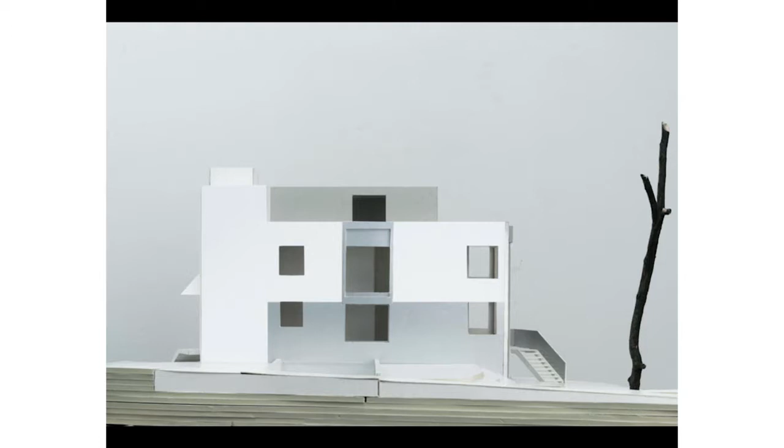When we design facades, we always look at the volume in a planar way. We don't try to look at it over the corner. With this building, we made every facade almost different. This is more like a shield that contains the loggias. The back facade is more free flow. And the facade to the street is very figural and plastic. Of course, it's the main paradox of architecture that you're doing volumes that are at the same time composed of planes. So is it planes or is it volumes? Or is it volumes or is it planes?

The plan is very simple. It's divided into 2 parts. There's a big living room and the bedrooms are in the back. There's a central pillar that unites an extra room that you can connect with the living room or have open. The windows themselves define areas that structure the space.

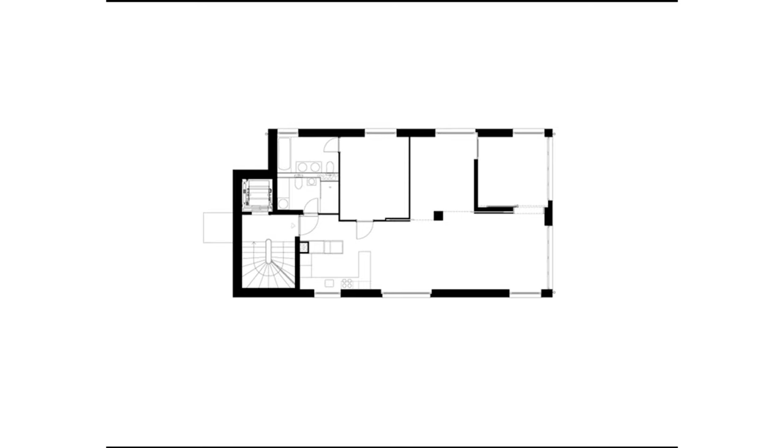We were super happy with the project. The client was super happy. We submitted the building permit. They came back very quickly. Two weeks later, we received a letter. The client received a letter from the municipality saying, when we digitized the zoning plan, we made a mistake. You don't have a B2 zone, but you have a B3 zone. So the client called us and asked, is that good news or bad news? We said, it's good news, of course. It's 70% more area on the site. That was a huge problem for us because we...

I think it's me. I think... You want to switch? Yeah.

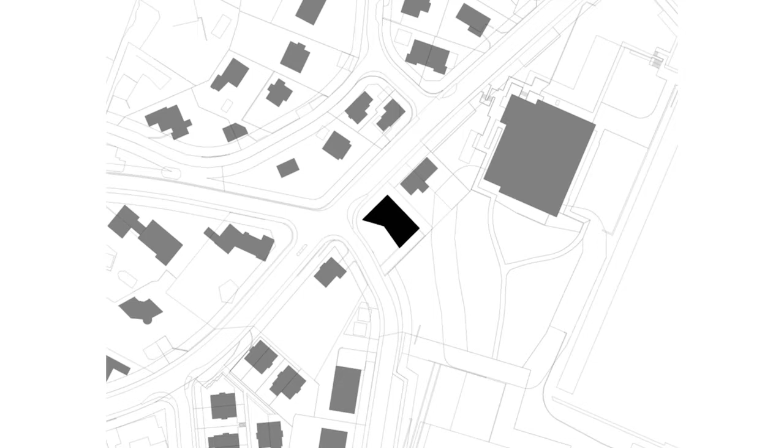It was a huge problem for us because we were so happy with the first project. It had a nice vertical volume, it was very figural, had presence. We ended up with something that was more like this - very horizontal, a bit too big for the neighborhood. It had all of a sudden 5 apartments instead of 3, and it raised a lot of questions about collectiveness and expression in a building like that. It's not a real apartment building, but then it is an apartment building. The plan went from this to this.

So what happened is that you recognize again this kind of chaotic sense of cellular rooms and angular walls and all that stuff, but there are also these pillars. These pillars have now a slightly different function. They're also about centering space, but they're also about connecting space.

In this case, you see that they are creating a center of a common space, a common living space. At the same time, they're separating the living area from a kind of winter garden and a loggia, which is an outside space. So while all the spaces are, architecturally speaking, interior spaces, some of them are in reality half outside and half inside spaces. So this pillar does an interesting thing - it connects all the spaces while also separating them. And to make the point, one of these pillars is load-bearing, is structural, and the other one is hollow, so it's architecture.

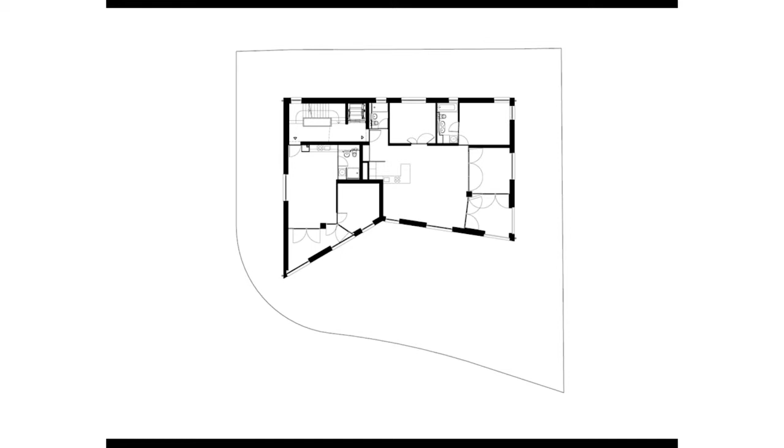The facade, the main facade that was the garden facade in the project before, became the main facade on the street side. Recycling.

It lost a bit of frame, but it still has this central motif. We also made it slightly higher, put that line down in order to lift the gravity of the facade in a zone, like this. So it's a real piano nobile. And from that piano nobile, there's windows hanging from that line, because the fundamental problem of a small multifamily dwelling is that you don't have enough stories, enough repetition to create an idea of collectiveness.

You have just 2 stories. It's really stupid - is this a single family house or is it something collective? It's the same apartments, just rental stuff, rental apartments. So what we decided to do is only in the facade create a difference, creating a motif where the top floor becomes the piano nobile and the other windows are kind of attached to it. So there's a hierarchy in the facade that does not exist inside the building, besides the ground floor having a different relationship to the ground than the top floor.

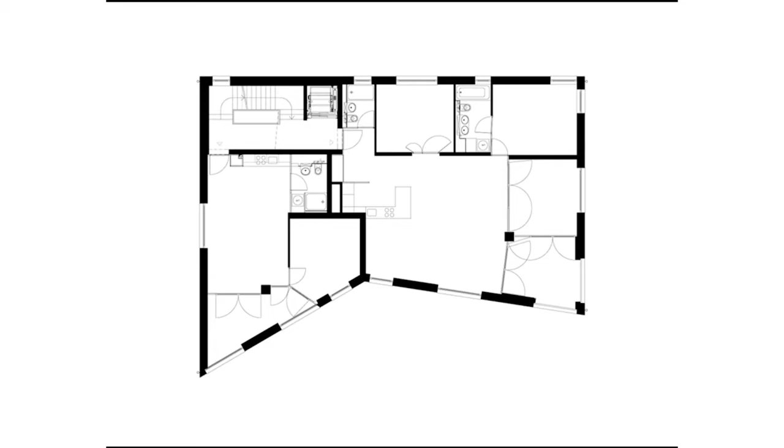We were looking at the Laurentian staircase by Michelangelo, and what we discovered there is something really curious. While you think it's classical architecture, when you look twice, you suddenly realize there are these elements—columns, pillars, pieces of walls with frames and framings—but they're not connected. They don't have a hierarchy. They all are separated and sit next to each other, with some space between them.

So what we discovered is if you put things together, just by putting them next to each other, there's a relationship, and that's really fantastic. So the singular element retains its power, its independence, and its dignity while it comes together with other elements without actually physically touching. Michelangelo is a master in separating elements and working with in-between spaces, proximity, distance. The corner of the Laurentian Library where the columns disappear into darkness with a pilaster—James Ackerman wrote about it. The columns are not meeting, they are mating.

And what happens if you look at the section, this kind of constructive structure of that project, you discover what kind of hierarchy this project is about. It's crazy—you see the architectural niche with a piece of pillar starting to the left, with two columns enshrined in that niche. Behind there's a thin wall to the main library space that's maybe only 15 or 20 centimeters thick. It's ridiculous.

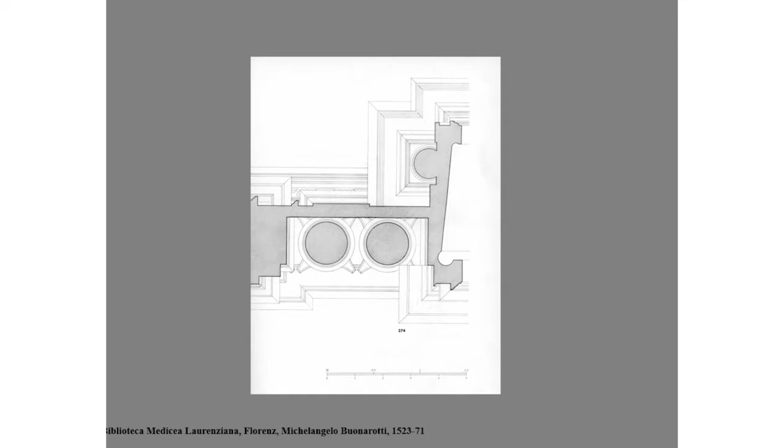There's maybe a contemporary dilemma with classical architecture and with putting a column next to a pilaster, which is a dilemma that we also haven't solved yet, and I don't think we want to really try. But in contemporary art, sometimes you find ideas that help you solve these dilemmas.

So this pair we really adore. It's by Richard Artschwager. It's a door and a super elegant typographical sign that could almost be the moustache of a French gentleman. This elegance is counteracted with a door that is out of proportion, that has a painted surface that is also in a kind of awkward way. And those two things really work just as a pair, with an incredible energy.

So what we were looking at on the inside was the question of how the outer windows relate to the interior windows. We discovered that if we identify them with one another, if they are actually the same, it would be better. So we took the scale of the windows from the outside to the inside of the building, and these pairs of openings actually have the same dimensions as the windows. We're not talking about a difference between a gentle interior texture opposed to a kind of shell - it's both, and it's the same. We take it from outside into the building.

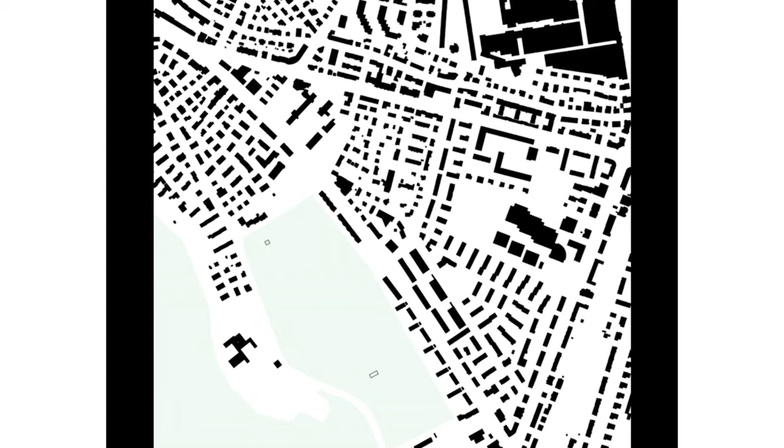That's the main characteristic of that area from the post-war expansion of the city. So while we had to replace a building and do a much bigger building, we wanted to respect that spatial texture. The figure we came up with seems expressive in its form, but it's not meant to be expressive. We conceive it as a series of planes, like a paravent, that's being folded, demarcating a site, and at the same time shaping the surrounding area.

On the north, the upper side, it follows the little road. On the southern side and the others, it's kind of hugging spaces that are defined by beautiful existing trees. So it's creating a series of exterior chambers.

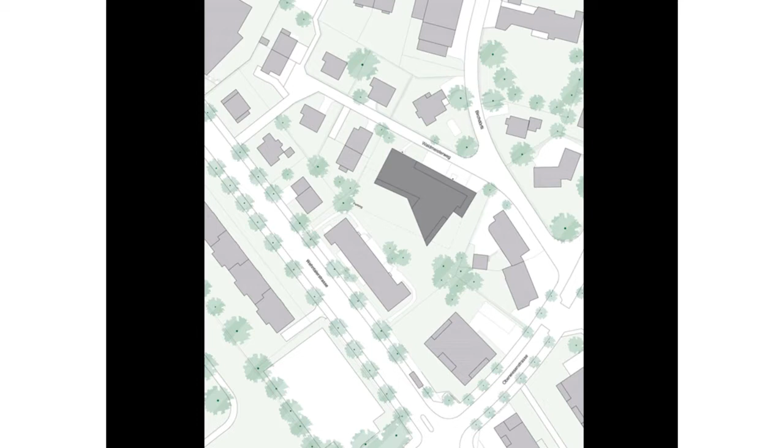What? Exterior chambers. Oh, exterior chambers. That's good. You never said that. So this is partially stand-up comedy here. Yeah, it's a bit early for that, huh?

The plan we insisted on being rectilinear - there's only very few exceptions where we had to mediate between the angled walls of the exterior with the structure of the apartments from the inside. We kind of saw it as if you would cut out a city plan with a nice shape.

So later we discovered - much later, of course, we're honest about that - this work by Sol LeWitt, where he stayed in the city of Amsterdam and took a walk from one place to another, and at the end of the day he would connect the dots of his walk and cut out the piece. So it's really kind of the negative of what we're doing.

There are clearly competing needs in architecture - the need for an interior structure and the need for the exterior form - and we feel increasingly that they cannot always be easily reconciled or harmonized into one. But in our design, we want to retain the tension between these needs and necessities. So there's a kind of half autonomy of the parts - the facade is partially autonomous versus the plan, and vice versa.

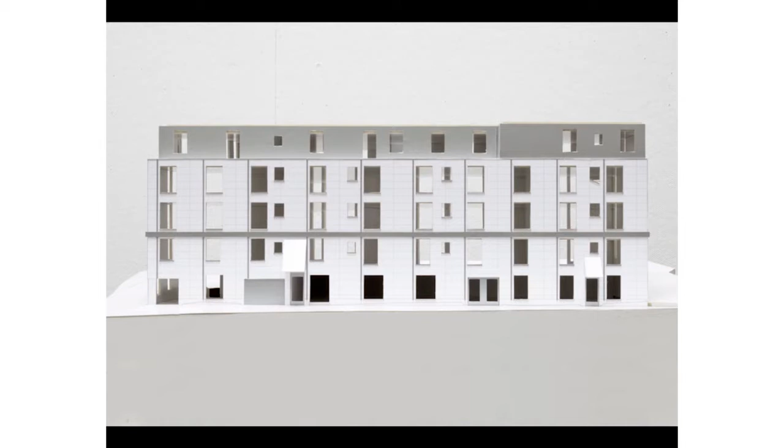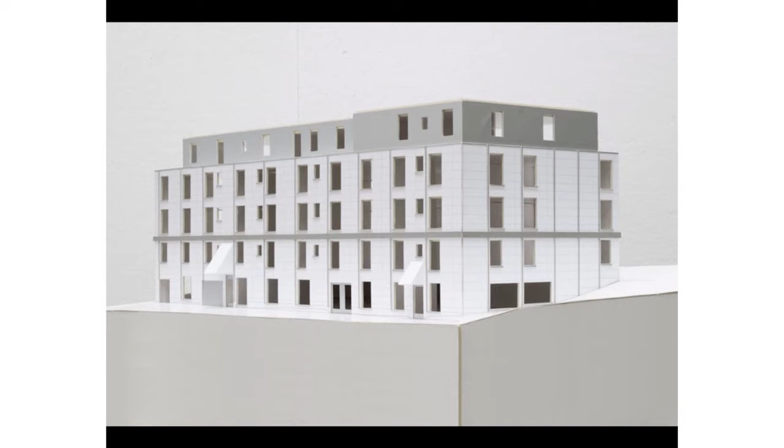The practical reason for this was that the topography of the site would rise almost by one story toward the back of the building, which you can see on the right side. So what would have happened if we had built the building from the bottom up? The ground floor would start to sink into the ground. So by lifting that center of gravity, creating a central line, you somehow solve that problem, because it doesn't matter if the line on the ground is a bit wobbly and rises.

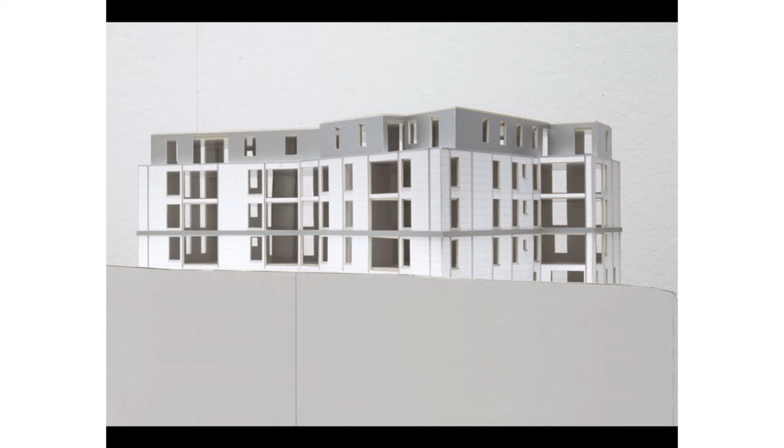And it also goes back to one story here on the garden facade. You can see how you can integrate loggias within that system without destroying the surface quality of the building, even though they are really big holes.

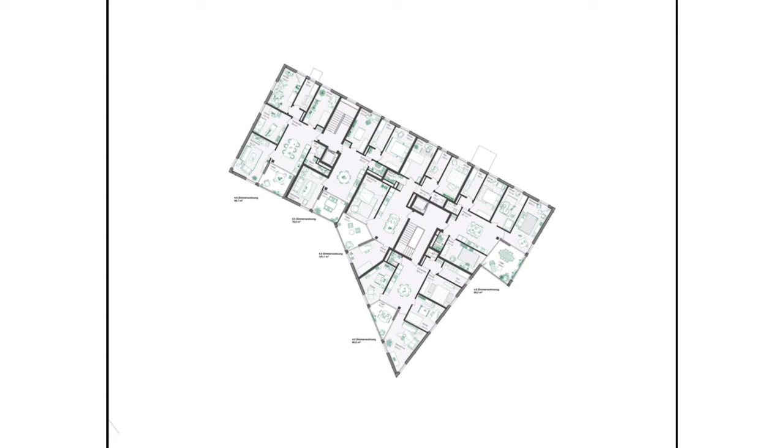The client asked for a specific solution for the living, dining area. A lot of apartments being built in Switzerland at the moment feature a connected space where living, dining and cooking are in one room. Low-cost housing in Switzerland doesn't mean you can build cheaply, because wages are very high there. But what you can do is design apartments where more people live on the same surface, and find smarter solutions for plans.

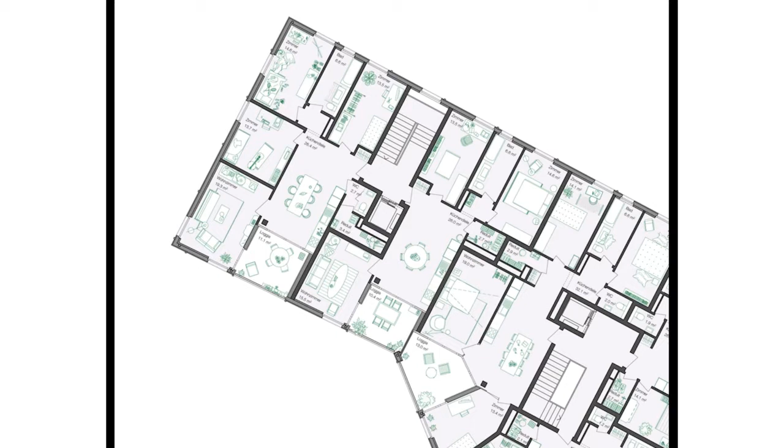So the basic idea of the plan is that you enter into the kitchen. It's quite a rural thing to enter into the kitchen. It's a big kitchen distribution space, and attached to it there's a living room that you can close off and also use as a bedroom. And in this triumvirate of kitchen, living room and loggia, there's a load-bearing concrete column in the corner. Then the bedrooms and bathrooms are on the backside. Even though the shape of the building generates variety, the principal idea of the apartments is the same throughout.

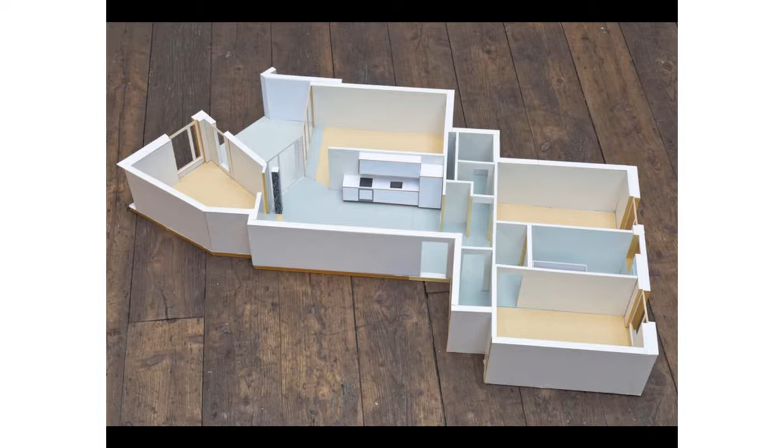This is the moment with this kitchen room, the column. There are different floors - a kind of overlapping tiled floor next to the living room, so that you can bring in plants and put them here, and the parquet. And there is a shadow - the column casts a two-dimensional shadow. So there's always sun shining in this apartment, even when it's very grey in Zurich.

We took that idea from Johan - Johan Celsing. Is he in the audience? He's skipping the lecture, but it's in the house of his father, in the entrance area. There is a shadow made out of stone. This is a bit more brutal and poppy, I would say, and less refined and elegant. But it also serves, of course, as a threshold that connects the two rooms.

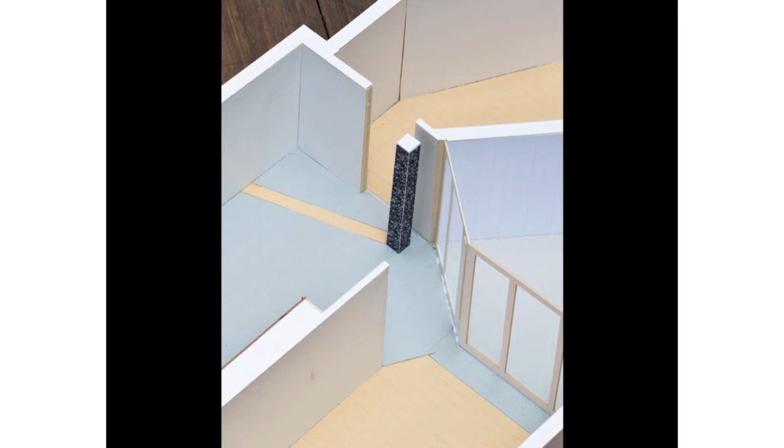Oh, that just hurts my heart. Yeah, huh? I know, we lost this competition last week. It's in Munich. We came in third, you know, and it's really an amazing story.

For the Germans, and I guess like for all the other Europeans - Switzerland has an amazing competition system. As a young architect you can do public competitions, you're able to win them, and when you win them it's very likely you'll build them under fair conditions. In Munich it's quite different - there's a city architect who selects the same kind of 12 offices for invited competitions, so it's really hard for young practices to engage and build up a practice.

We have friends of ours who decided to change that. They said, fuck the system, we become the client ourselves. They founded a cooperative called Kooperative Großstadt, and with subsidized money from the city of Munich, they bought a site in an area where nobody wants to live - Riem, München-Riem, where the old Messe Gelände was. You can see it on the site plan - all very polite buildings, but with a lot of distance. It's quite green, a complete lack of urbanism and intensity, even though it's not a modern city plan. It's a kind of contemporary city plan that's about framing the streets while still being open. We really wanted to win this competition, but it was an open one, so it wasn't so easy.

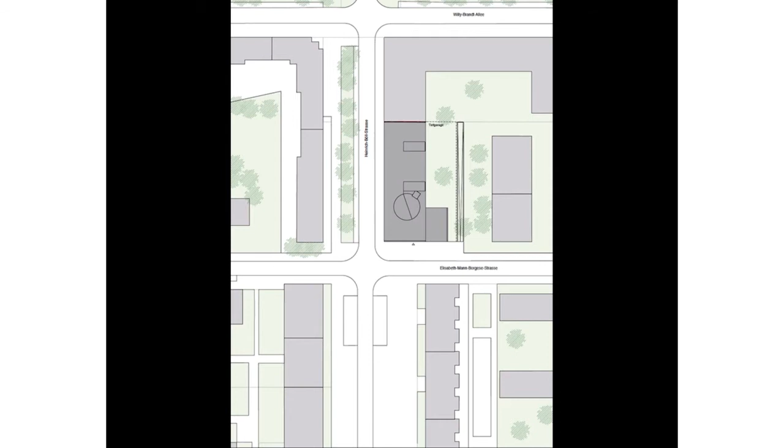On the ground floor they have a program, it's kind of, how do you say that in English? A workshop. It's a workshop for the people to live there, but also for the whole area. There is a cafe, library. It's kind of quite a loose situation. A public program.

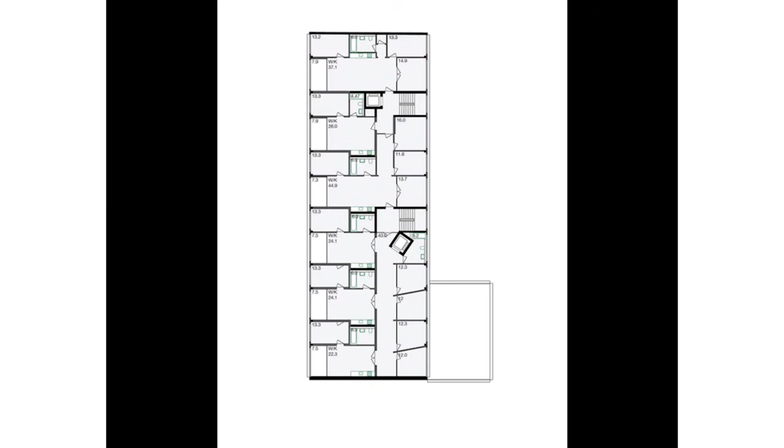We decided to have the normal living on a core in the back side and the special living in the front side. You can see there's a certain generic quality about halls spanning through the building, and there's another big hall inscribed in this stripy texture. It's another special program here. And then there's a beautiful little roof kitchen with a garden on the outside and lots of solar panels.

For you, Tom, huh? Scully, huh? Not you. He's Irish.

We were looking at this painting by Sean Scully, and it clearly shows a cohabitation of two different sets of stripes that would be independent yet connected, that have different scales, that have a different texture, and we were looking at that both in plan and in elevation as a main base idea.

The interesting thing about these paintings is that the stripe is very generic. But by juxtaposing two generic ones, there's something that you could read as a figure, or at least there's a communication and a tension, and there's a fracture, and there's a lot going on.

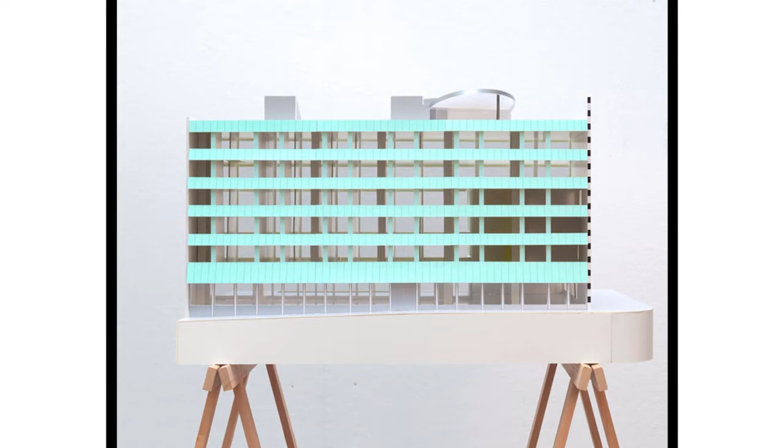So our long street facade had to accommodate loggias and glazing, so we quite coolly just made our green stripes. And then when you come around the corner, there is this kind of Josephine Baker wall that connects and overlaps with this, with a huge two-story loggia.

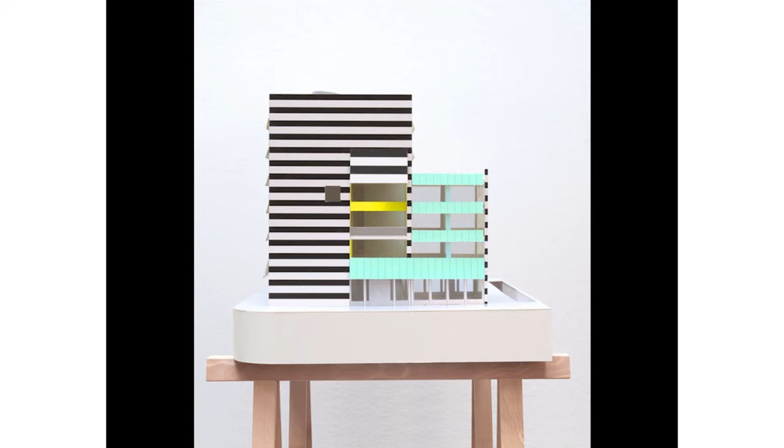We were thinking about what does this utopian collective living mean? We think it's not just about accommodating certain needs and doing the mechanics of the utopian age, but it's about advertising that, giving it a voice, giving it a language that is projecting outward. Because a local utopia within the city becomes very problematic if it becomes a shielded private dream of a group of citizens that would want to exclude themselves from society. But we think it should be the opposite. So we are trying to be as aggressive as possible and as joyful as possible.

You can see that here these plates are sticking out, so it's a very fragile plasticity. It's more like leaves almost, and less like a closed surface. And like in the Scully, it's about the scale of housing being really defined. It's defined by the repetitive stories, it's defined by the scale of spaces of their windows. So in housing, you can immediately read it.

So for the collective, it sometimes becomes problematic if housing is not more than the addition of its single parts. So what we are trying to do is create incredible jumps in scale, while the totality of the striped facade versus the singularity of the loggia, the big cut with the yellow cut, versus the kind of structural repetition of these green stripes, this dramatic jump in scales and the juxtaposition of those scales, we thought was a good way to talk about the collective.

And you see, even though this might look quite postmodern, there's no irony in this project. It's dead serious with a lot of humor.

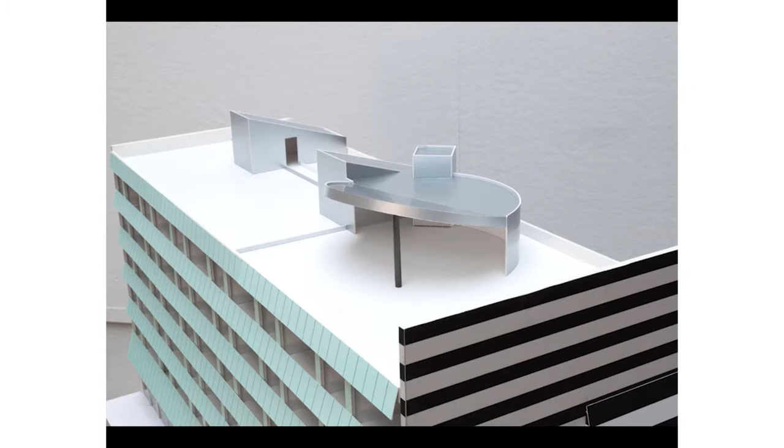And then there's the roof garden that's a bit more free.

As we said before, the idea is that you work with this very simple, very rigid structure, and then you insert a figure into this. This was really inspired by another example from Italy: the typology of the Venetian palace, in which from the main canal there's a big hall inserted into the volume of the building, which goes deep into the building. It's called the Portego, and it's connecting interior courtyard spaces. It's at the same time the main collective space within the building and the distribution space.

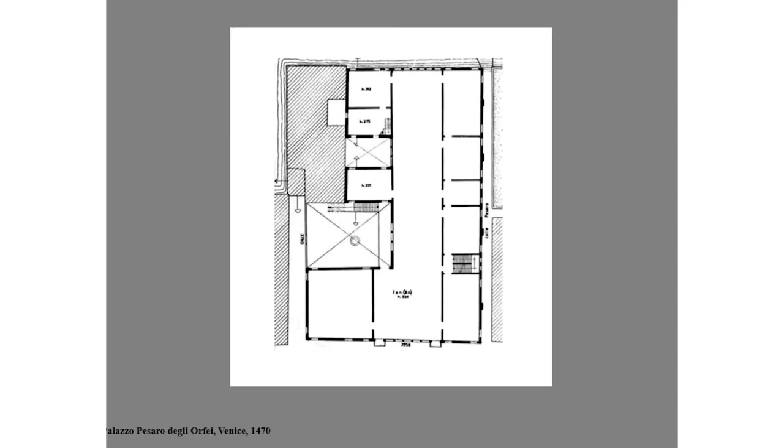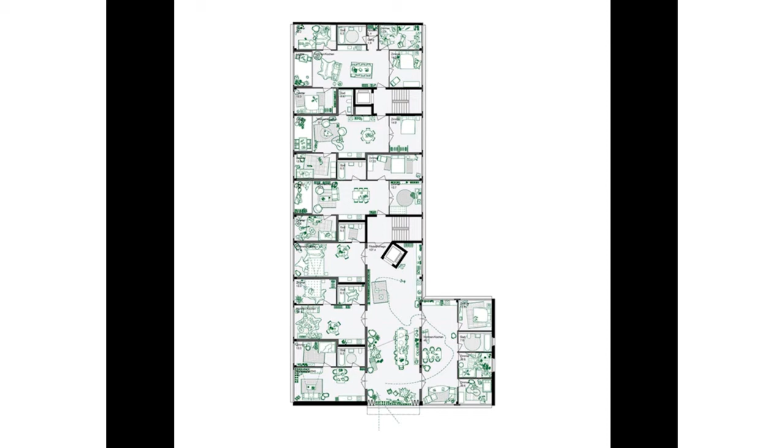They wanted something that's called branch living. So those apartments here and here are a bit smaller than the conventional ones in the back, and the area that they lack, they gave into this big branch. So this is a 2-story room, there's a balcony here, there's a big collective kitchen, it works like a winter garden that you can open, and it's so big that it can be programmed in several ways. This is the room.

The last project. Hang on, there's a quiz question. Are you ready for a quiz question? So what do you think this building is facing?

Holland. Yeah, it's actually something like Holland. I think there's another truth to this. Actually, Tom, you're pretty close, because it's a rational, industrialized way to talk about agriculture.

So you're very close—it's the slaughterhouse that it's facing. This house is in the last building block of Zurich. You can see here the structure from the turn of the century, the block structure. There's a really long block here that at some point just stopped. There is the slaughterhouse here with thousands of animals dying every day and with quite a nasty smell from time to time. And there's the football stadium right here.

So we're looking at the heroic situation of the modern building, the edge of the city, where the city ends and the sprawl of the countryside begins with IKEA and all these big boxes. It's the end of the city. And it's the Limmat valley, so it's actually like Holland—it's very flat, but it's surrounded by hills on both sides, not mountains. And so there's beautiful, huge allotment gardens in the back.

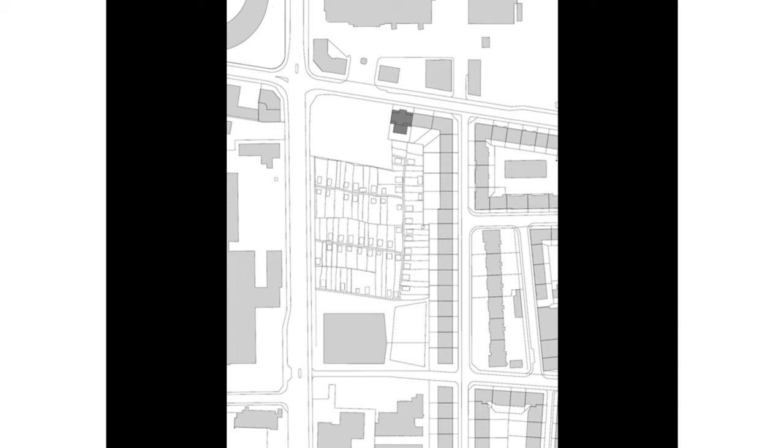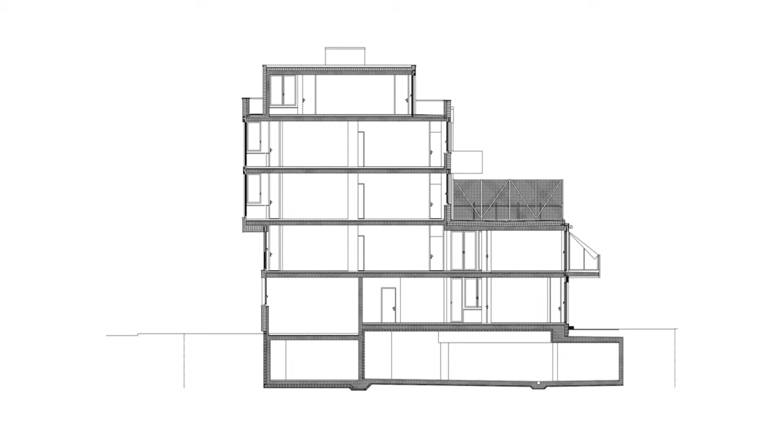Towards the street side, we really try to be contextual. We try to make a plaster building. We tried to work with vertical openings to kind of fit next to the neighbors, but it was always a huge problem. The buildings next to it would just take command of our house and would kind of take it down and make it always feel very weak and not appropriate.

But when we decided, then we said, okay, let's just make a modern building—let's make some band windows, big, direct and brutal and modern. From that moment on, the building had its autonomy, and it actually entered a dialogue with the neighbors, a fruitful dialogue. All of a sudden there was a distance between them, but it was a bit like at a party when you meet people that are different than you, but you can still be polite with each other and have a good conversation.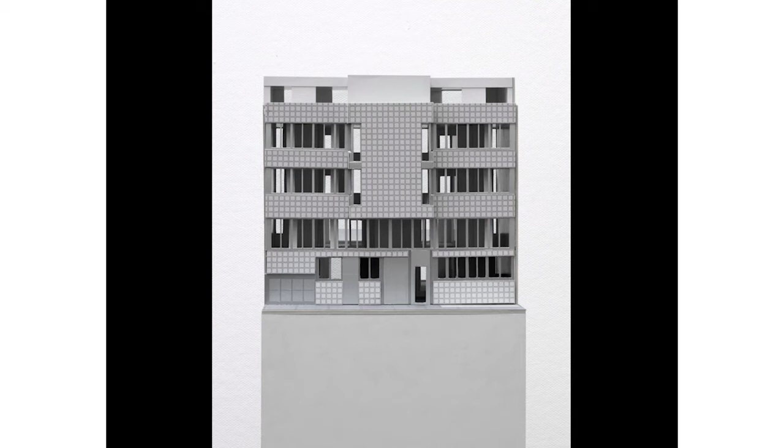Our two big brothers we were looking at, or the two absent friends, as we say sometimes, were Le Corbusier's building at the Porte Molitor in Paris, where he, as you know, lived on the top floor, and the Palazzo Rucellai by Alberti in Florence. It's a strange pair, isn't it?

But the reason why we looked at them is that it's very obvious in the case of the Porte Molitor immeuble, because it has a texturedness of frames and fillings, and there's an incredible development from the bottom to the top, a transformation of figure where you are not able to read where the base of the building begins and where the proper building is starting. So the base could be one story, it could be three stories. There's an overlapping of figures over the height of the building.

While we were looking at the Palazzo Rucellai for a different reason—you all know that it's mainly only a facade. Rucellai bought up a few houses, and he had Alberti do a new facade. He tried to buy more houses to make it bigger, and that never happened. So it's a facade project.

But what he did is he used the classical orders—horizontals, verticals, and pillars—but at the same time he was talking about the wall. He did a rustication of the wall. So is it wall architecture, or is it the architecture of order? In fact, he collapsed both of them in the same plane. You can see that the rustication casts basically the same shadows as the classical order. So it was clear that it was not about a hierarchy of these two elements, but about doing two things at the same time. It was about the architecture residing in this relief and in form, and all things come together.

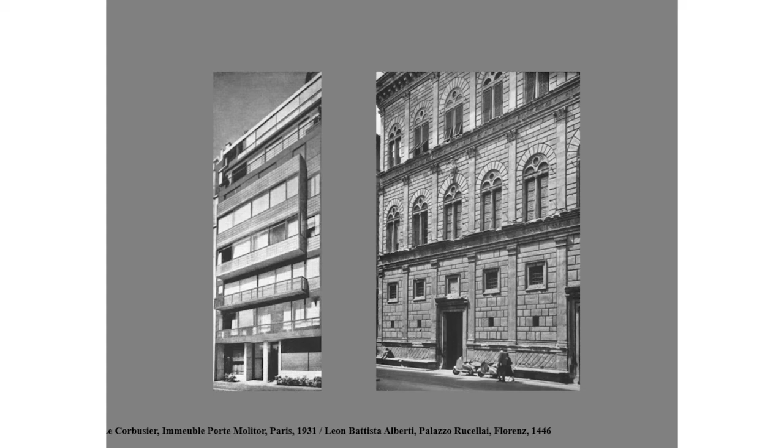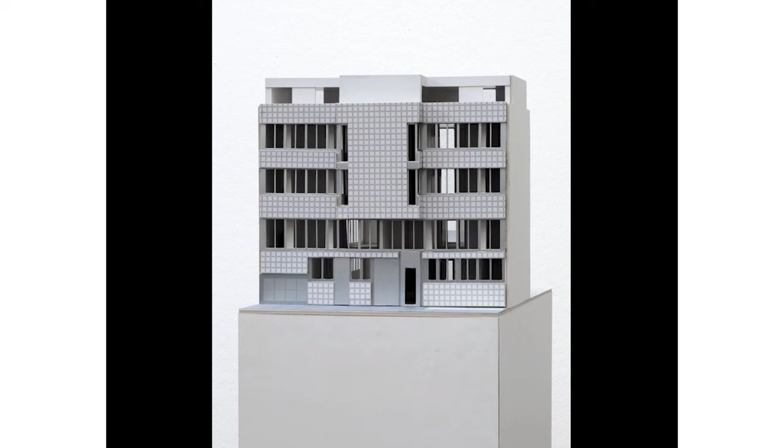So this is a rusticated facade with band windows, but it's also a ventilated facade. These are glass fiber cement panels. They're 16 millimeters thick, and the rustication is another 16 millimeters. So there's no idea of weight and mass. This is more like a helmet or a thin armor.

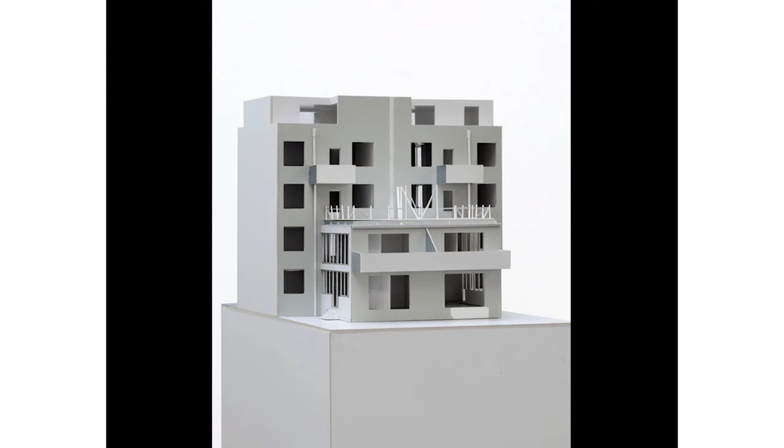And the back facade is a cheaper facade. It's an outer insulation, but also here the question of volume and planes was crucial in development. So you can see that this is a facade with a different render, a different motif than this facade. There's a joint, an artificial gap that separates these into plates and not into a kind of mass that is stuccoed. In principle, this project is about spending your money on the front facade and doing a rather cheap back facade. That was the strategy used all over the world for most of history, to create a kind of intensity on the street side and a kind of decorum by being quite simple on the courtyard side.

When you do a band window, there's the problem of how you solve the structure into the facade, and we were happy to engage with the idea of the plan libre if it's a modern building. I guess it's a different plan libre than you would see in Corb or with Mies, because for Corb the plan libre was interesting in that every floor could be different—he almost didn't care about the columns. With Mies it's even worse, he tried to make the columns disappear. But here we engaged, we thought it's great to use the columns in order to structure space.

And the way they're set is almost in an urbanistic way. You can see that they're parallel here to the main facade, giving a stop to the space coming from the outside, or giving a hold on the inside and establishing this layer of space. It's like the space from that open plane, from the sprawling plane, flooding into the main facade. It's a very different experience than from the courtyard side, where it's really protected. In the depth of the building, we turned the pillars and made them also substantially thicker, and they form a kind of rhythm of this long, free-floating space.

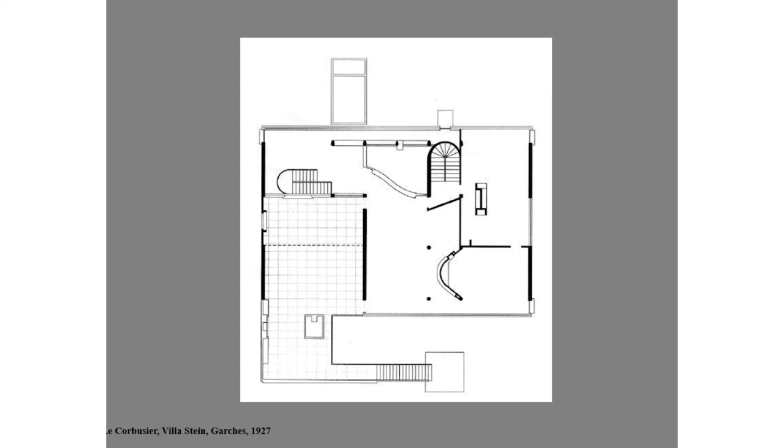And these columns, for instance, are not drawn in the Oeuvre complète plans, but then Rowe unearths them. This idea of transparency was also important in our plan, but you see it maybe better in the images.

There are high rooms, they're 2.85 meters, because we had a maximum allowance, but we're only allowed to have 4 floors.

And also we're talking about the singularity of things. When you do plumbing, sometimes you end up with very funny shafts that are kind of standing in the way. Instead of suppressing them and hiding them, we integrated them somehow into a series of planes and a relief.

And the problem, we realized that very late in the project, but we said okay, it's good, let's do the band facade on the street side, and let's do the punch windows, the kind of mural facade on the courtyard side. But then think about the interior.